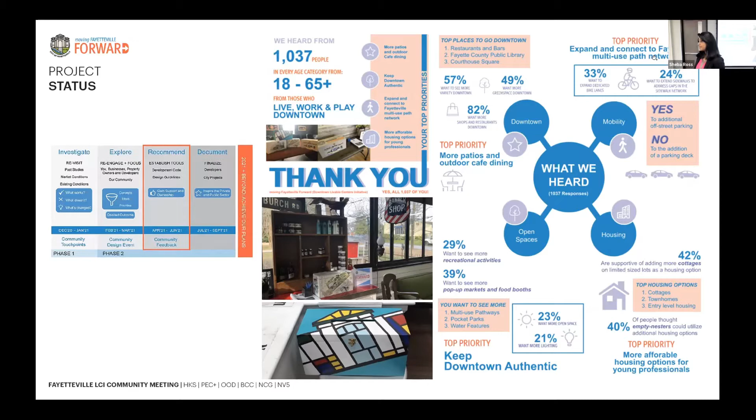We are not here to raze anything and bring in the new. We are here to enhance the best of what you already have.

I think one of the biggest outcomes of the community meeting is naming this project. If you remember, we asked you, and this particular name, Moving Fayetteville Forward, came to the top of the list. So we no longer go through the long name of Downtown Fayetteville Livable Centers Initiative. We call it Moving Fayetteville Forward. But as a team got together, we started thinking, what does it mean to move forward?

I think one idea that came to the surface is the fact that moving forward is not just in one direction. Like we can think about our opportunity here with downtown as a compass. And if you actually literally take the fact that a compass has north, south, east, and west, and connect it with the idea of what the Livable Centers Initiative really needs, we feel that your compass, Moving Fayetteville Forward, can be set with this idea of nature.

You have abundant nature here. You have representation from the Southern Conservation Trust. And you have creeks. You have access to large, beautiful open spaces. So we wanted to commit to preserve nature.

We wanted to look at economy. So Brian, I hope you're happy with that, because that's a central pillar, right? It's really no use having a plan that doesn't have strong economic impact. So we want to commit to economy.

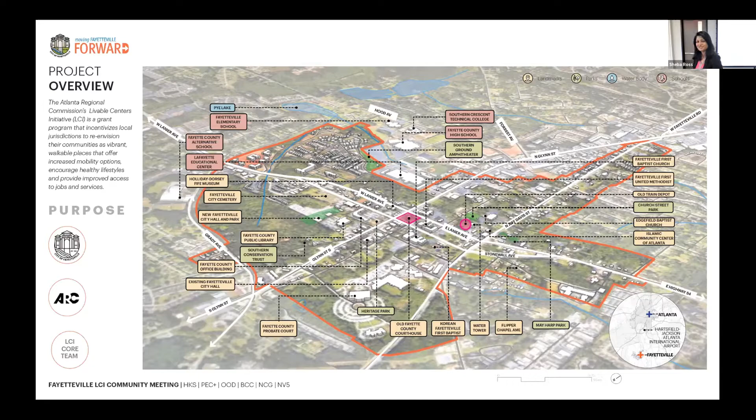Knowing that we want to set this up as a compass, I'd like for you to imagine this kind of character identity for your downtown. We talked about how you have about 900 acres, and we want to give it a sense of identity. So what we were looking at in terms of progress since the last time we spoke is what if we imagined the central downtown area as a core, and what happens in the north really as a gateway.

The reason we're thinking of this as a gateway is because we see this opportunity that's going to be happening in the North 85 corridor. We can see how, as people drive down from Atlanta, what's their first introduction to this beautiful Fayetteville downtown? What are you going to be doing in that North 85 area that could revitalize and become a portal to your downtown? So we were hoping we could characterize that area as the gateway.

And then you have the village. The village is really an offshoot of what is already happening with your planned unit development. You have the villages of Lafayette. You have a really well set planned community. And we would like to continue that character towards the west, towards the northwest of the core.

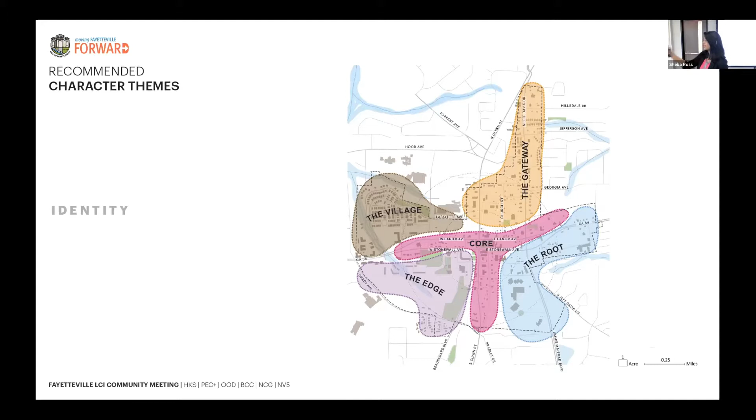So this characterization of a root plays really well with its counterpart, which is the idea of the edge. When you think of the edge, it is almost a play on the word leading edge - this notion that innovation could happen. You have a large parcel of land available there, right where you have offices, and everything happening with the Southern Conservation Trust kind of comes together to create a nexus. So we believe that creating it as an edge will give it that purpose for innovation and have a very interesting relationship with the root area.

So this is just thinking of it in terms of broad character themes.

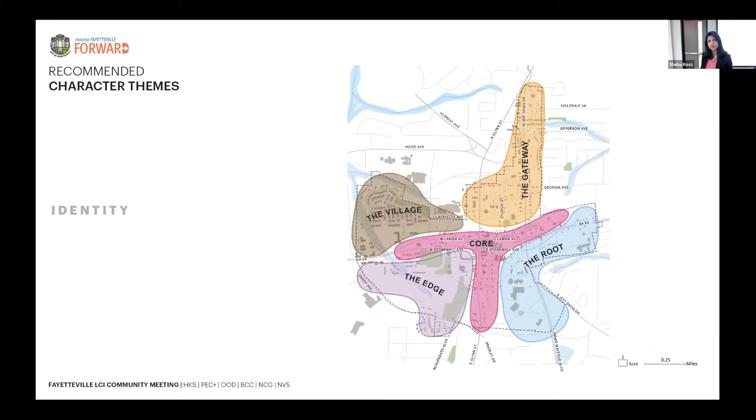Thanks, Sheba. My name is Russ Harrington, and I'm with the Landscape Architecture Division of PEC+, called the 360 Studio. We were looking at recommendations for parks and open space within the downtown study area of Fayetteville. We really based it on two things. One was community feedback from the previous meetings - what people wanted to see in their city, what activities people wanted to have that were accessible to them, and basically what people wanted. And then we also looked at available vacant spaces within the city, and that's where we based our recommendations for parks and open space.

The first one that really stands out is on the edge of Jeff Davis and Lanier and Stonewall. There's a conglomeration of vacant spaces right there on that edge that were identified as potential use for public space. There's a park close to where I live called the Abernathy Greenway, and I have some photographs of that park space that is very similar to this particular area.

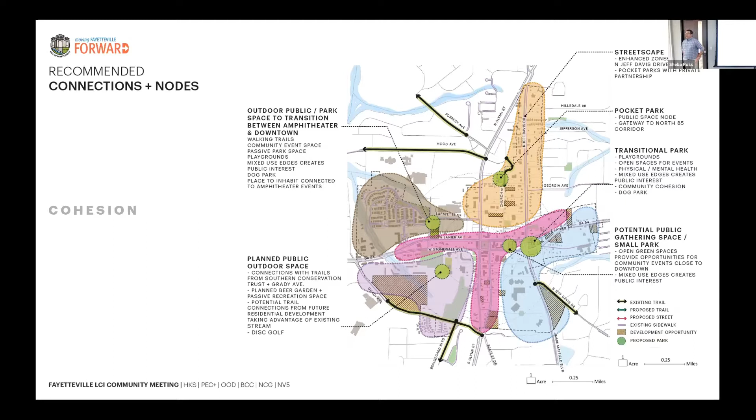Between Lanier and Stonewall, there's a vacant space that really serves as a great opportunity for public gathering spaces. There was a strong desire, one of the activities within the city that everybody liked to do—markets with tents, farmers markets, things like that—that were taking place on the road. I believe it was mentioned they were taking place on Lanier and some on Stonewall, but it'd be great if we had a place where that could take place all the time, somewhere that wouldn't impede traffic and could connect to the whole downtown activity we're talking about creating in this space. So that's the little smaller green bubble next to the one off Jeff Davis we were just mentioning.

The last one I'll talk about in greater detail—well, actually two more—is the area next to the amphitheater. There's a vacant space in this area that's not heavily wooded, but kind of nicely and openly wooded, which is a unique situation. It serves as a great opportunity for a transition between the activities going on at the amphitheater and the activity we're trying to implement in the downtown core area.

So it serves as a great transition space to get people safely from the downtown area to the amphitheater, and could possibly create some nice public space that does more than just add a transitional area between the amphitheater and downtown—perhaps a park, or a more open-area type of park, rather than the one I mentioned earlier, where you could have bigger lawns and things like that.

The last bubble in this southwest corner of the graphic is really just highlighting the public space already planned by the city, which is collaborating with the Southern Conservation Trust to create connecting trails off Grady Avenue and some of the newly acquired property by the Southern Conservation Trust. I highlighted that because it's a nice public space the city is actually pursuing at the moment, with the beer garden and some other things in that area.

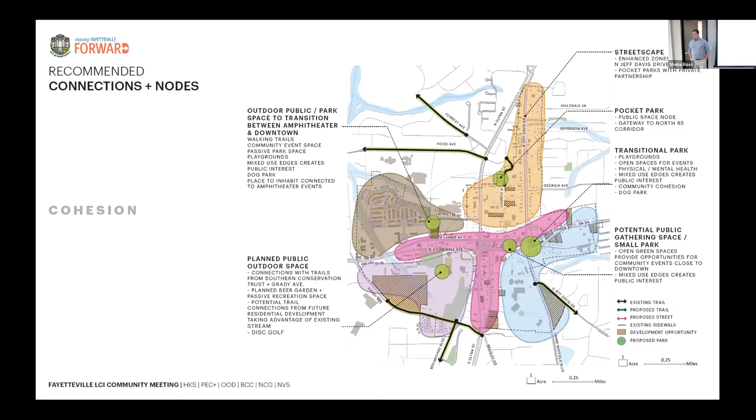So with that, I'll turn it over to Daryl, who can talk more about the transportation connections.

As we're looking at these parks as different nodes, the next question became: how do we link these parks so that they're meaningful and connect with the existing trails? That's really where we'd like to talk about the details of this.

Good afternoon or evening. My name is Daryl, I'm with NV5, and as Russ and Sheba have mentioned, I deal with transportation. I'm in our transportation and traffic group with NV5.

A large part of what we were thinking about on transportation with this project revolved around mobility, connectivity, and accessibility. One of the things we heard in our public meetings was that folks wanted to be able to move around Fayetteville a little bit easier, not necessarily by car, but by walking, biking, jogging, and not necessarily along streets with existing sidewalks.

But also to be able to do it along trails, and have bike lanes and that sort of thing. So one of the things we did through this is begin to look at where there were existing facilities, existing sidewalks, existing trails, roadways that had low traffic volumes, or at least enough room where you could do some things, and began to plan out spaces to build those trails.

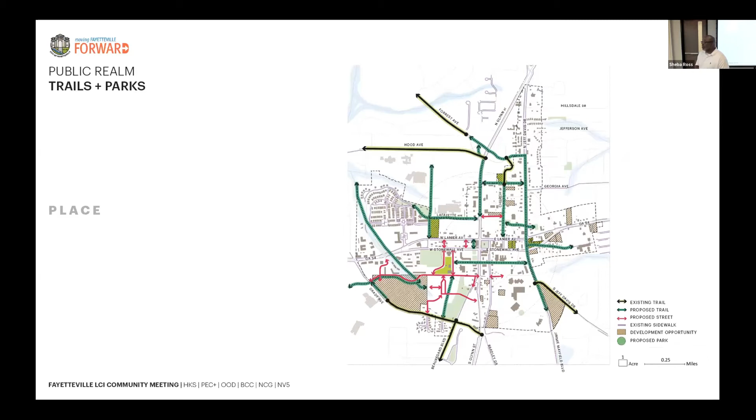One of the other things we wanted to do, and this goes to what Russ was saying, is that as we began looking at parks and open spaces, and places where people could gather, looking at communities, we wanted to try to connect those communities with those parks and open spaces, connect those communities with downtown businesses, connect those communities with the center of government, and all the activities we're looking at for downtown.

And again, we're not focusing on cars, we're focusing on people being able to come from the community, take a nice comforting walk, ride a bicycle, walk with the children, and be able to get to some of these places. And then even for the folks that are going to drive, some opportunities for them to come and park one time, and be able to get out and walk around through downtown.

So one of those opportunities is what we're calling the Alleyway Project. It is the area between - help me out with my streets here - Stonewall and Lafayette, where the Lanier... I'm sorry, Lanier and Lafayette.

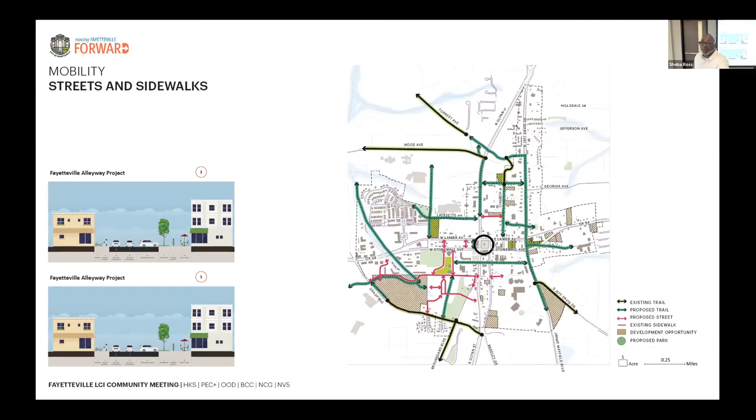Some of the other things we looked at were how streets like Lafayette could function - the idea that there are bicycle facilities within the Lafayette community, and then some on-street bicycle facilities on the main street, 54.

One piece of feedback we got was a desire to have more on-street bicycle facilities. The first thing we think of is making sure the street is usable for everybody, but also making sure cyclists are safe, that we're not putting them in a situation where there would be some sort of conflict with vehicles. So the concept we came up with here is something called a sharrow, or shared bicycle lane.

That ability to be able to have a lower speed street and also have the markings out that would allow cyclists to be able to use it. So it tells the driver this street is also to be used by cyclists, but it also gives the cyclists a space to be able to use the street.

We looked at that not only for Lafayette Street, but we looked at the ability to do that on Church Street and be able to connect the communities over on Church Street.

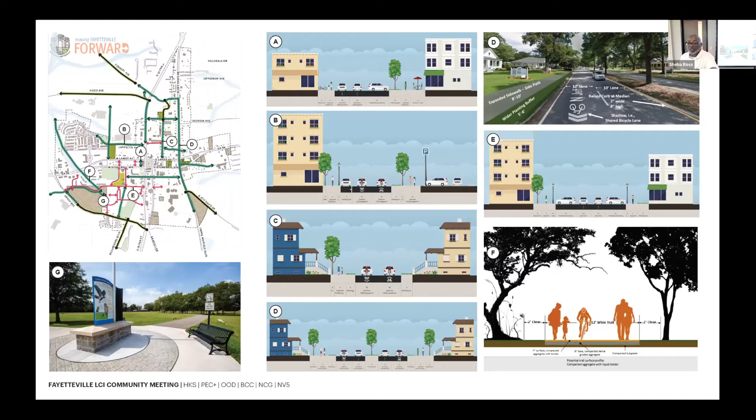Thank you. My name is Neil Desai with NV5. I'm a city planner, and one of my main roles in this project is to examine the existing zoning code.

And propose a new way of zoning in the city that's really going to bring together all of these thoughts and values that we've come across in the comprehensive plan and through the public engagement that we've already done for this meeting.

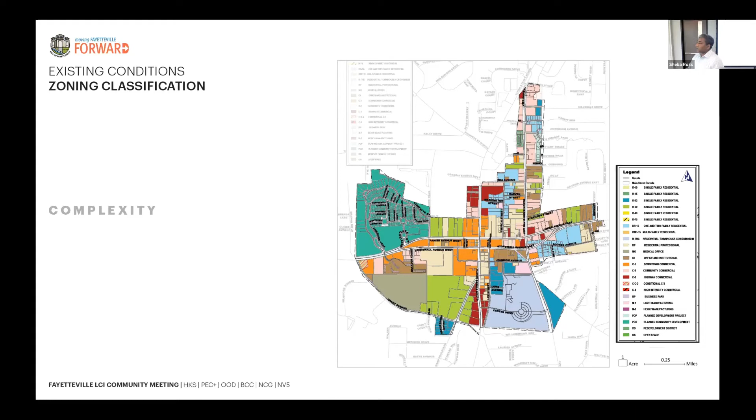And this is kind of the final layer. We've been looking methodically at general theme areas, which is what Sheba presented. We're looking at landscape areas and transportation, and now what are the rules going to be for the future? This map here, and we have a board in the back which we can all look at in more detail.

Where there's another area that's more commercial industrial. So you can start to see how these areas make sense in terms of what's already on the ground, the types of architecture and the types of buildings that are there.

So this isn't the zoning map, but it's starting to look at how we're going to start, what are the envelopes in which we're going to be looking at zoning. We want to respect the fact that downtown is one place, but it's consisted of different feelings around different areas. The traditional downtown core across from the courthouse has those small Main Street buildings.

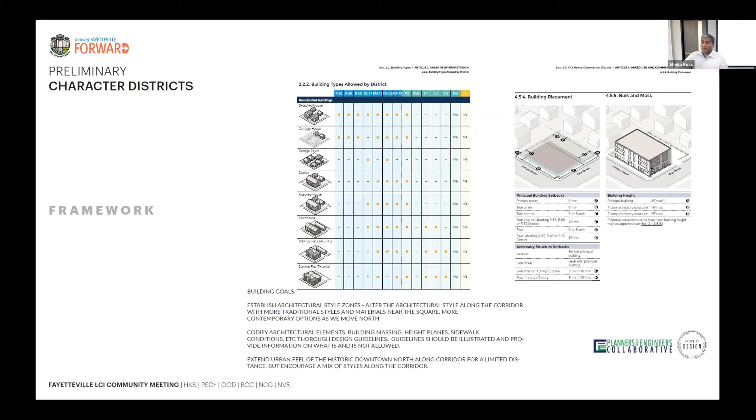I want to say that there are certain parts of the city where the zoning may not change at all. For example, the villages area is already fully built out, but we certainly want to include it as part of our analysis of the character. So this doesn't necessarily mean the zoning is going to change everywhere, but we're going to look through these character districts to see whether there should be changes, and what the nature of those changes should be based on the goals of preserving and enhancing, and wanting to evolve it into the future. This is the groundwork for the next steps of thinking about what regulations are going to be put forth to implement the vision.

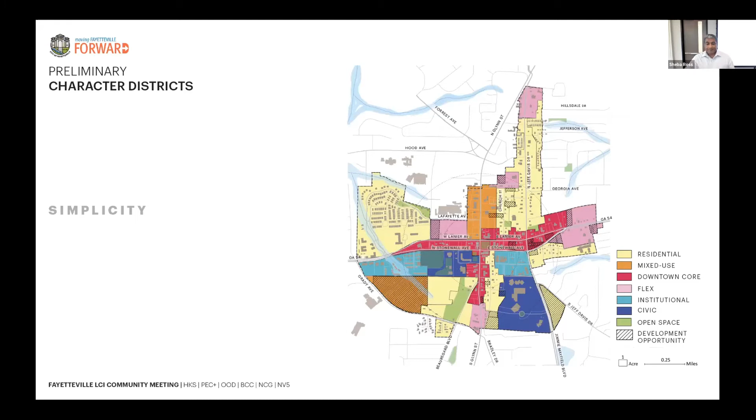Thank you. You can leave it at that.

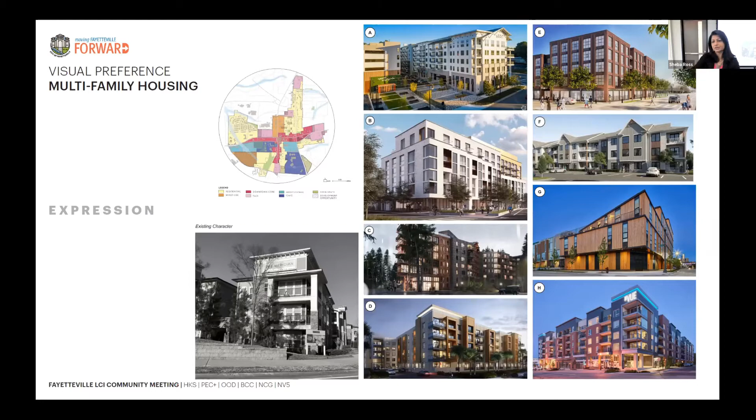This is the point in our meeting where we actually get to engage and hear back from each of you in different stations. We're going to do it in hybrid fashion, in person here and in our Zoom rooms. In the Zoom room you'll be broken out into 3 breakout rooms, with a facilitator showing you these different images as you're seeing here. We've printed and mounted these boards, and you're going to look through the different visuals.

Basically, we're going to run a visual preference survey. You'll use red dots to tell us images that don't jive with your vision for downtown Fayetteville, and green dots to let us know these are the spaces and kinds of buildings you want to see in your downtown. For those in the Zoom room, you'll let your facilitator know, and we'll do a thumbs up, thumbs down exercise.

This is for us to give us cues as we build these guidelines. We want to ensure that the guidelines we offer, as we connect them with the code, come from your preferences, from the community's preferences. We've already heard a lot of ideas through the survey, but this is our touch point to actually get closer to creating guidelines.

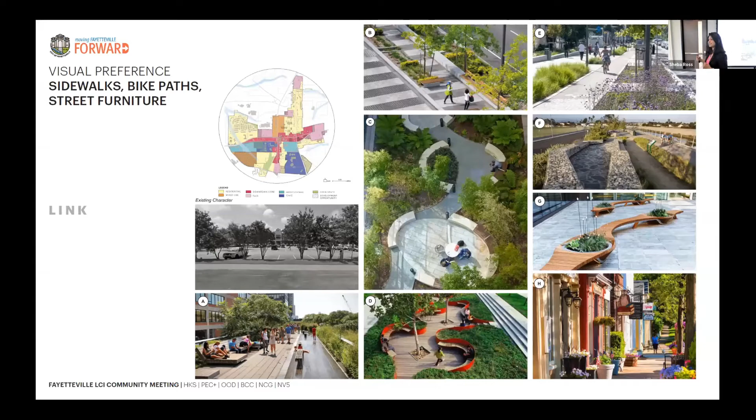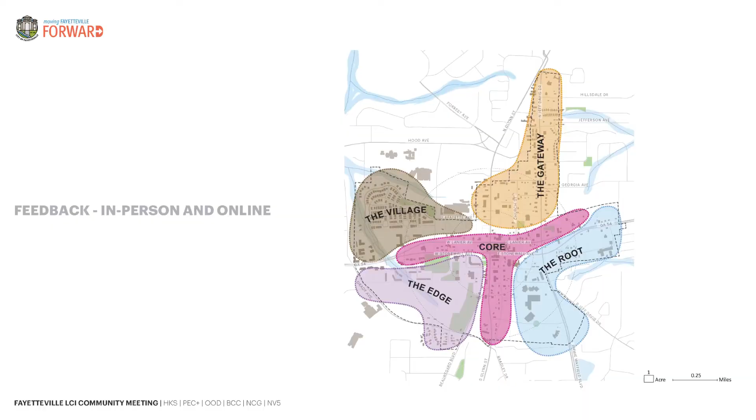So a short discussion on the maps, but there were a couple of questions related to specifics and details within here. One question, Sheba, was whether these images are going to be available in the future to share with the participants today, and I didn't know the answer to that.

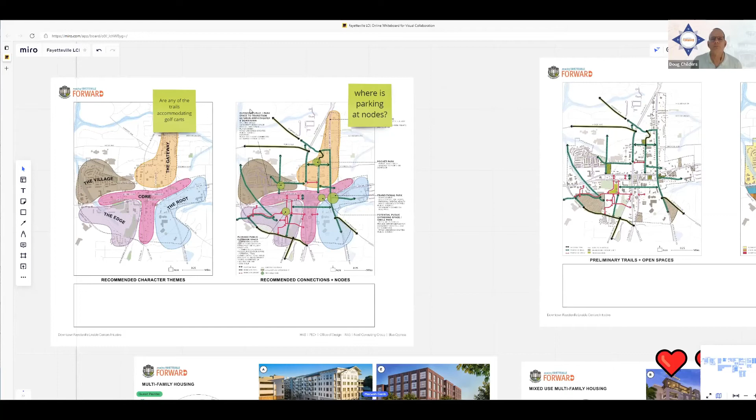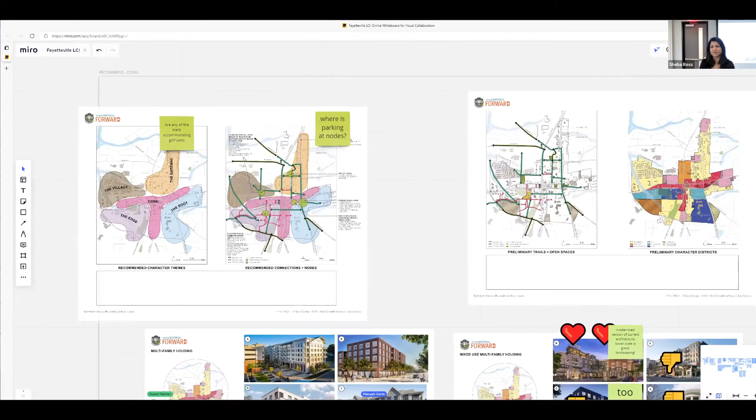Yeah, I can address that immediately. We'll be publishing our final plan sometime in August. Like I mentioned, these drawings came straight from our drawing board. Nothing is final, we have to incorporate your feedback. The recording of this meeting will be available online, which shows all the images too, but just remember that nothing is final.

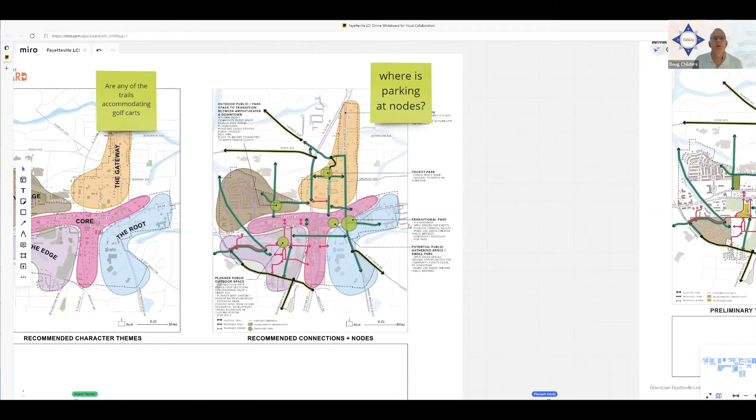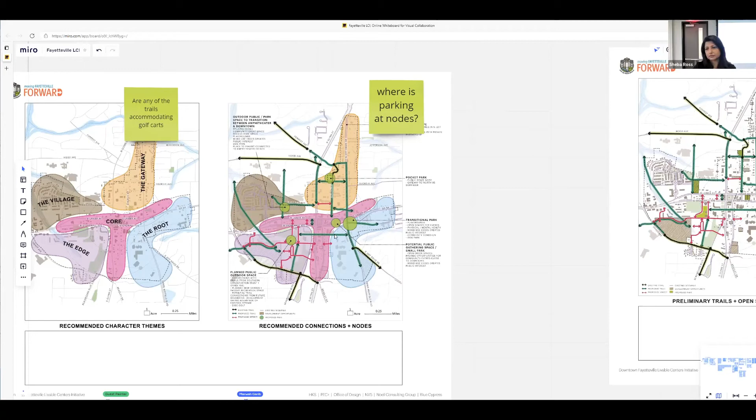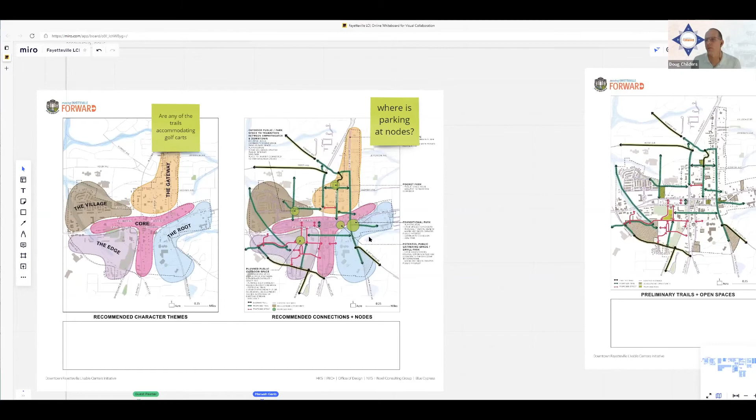There was interest in the text on here, and some people were having a hard time seeing the details, the recommendations within the parks plan. Another issue was parking—how are we going to handle parking at the new nodes we're proposing? I think the answer I gave is that it'll get studied in detail when those parks get developed and funded, and every one of them will have a different answer. So it's a really good question to keep in mind, parking in general.

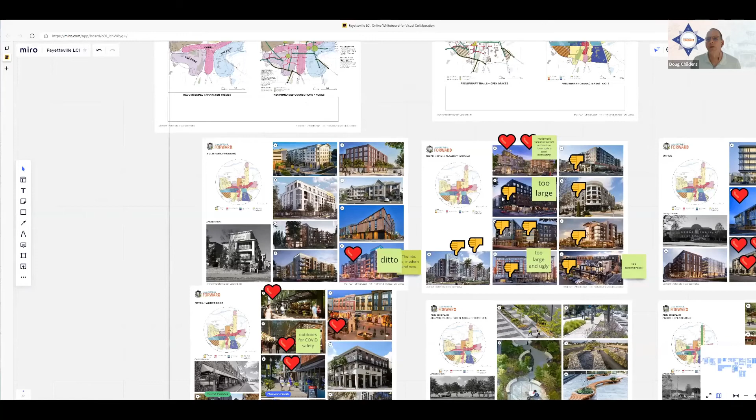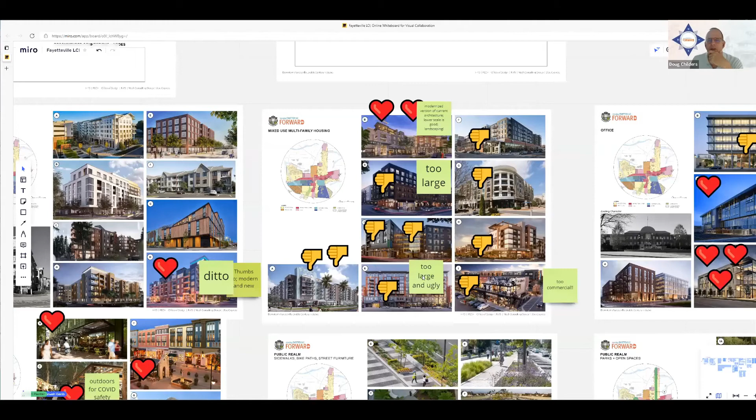We had a very opinionated discussion. Multifamily didn't get people too excited, but we got pretty interested in the mixed use discussion. I see so much thumbs down—I couldn't find my thumbs up, so I had to use hearts, and it got deleted. So heart, you get the idea, right? But yeah, there was a lot of thumbs down. A lot of these images felt too modern and too large in general.

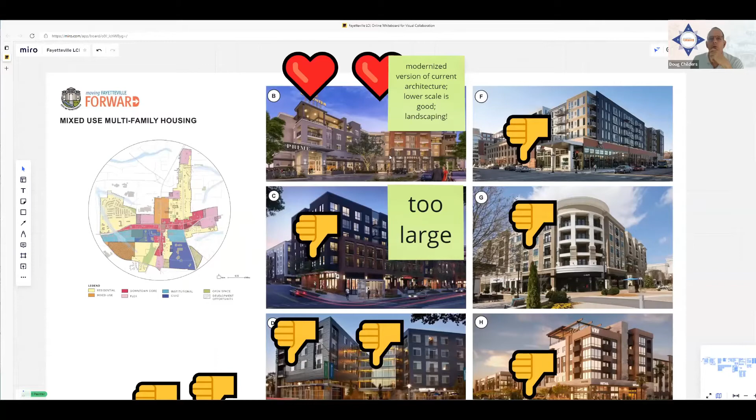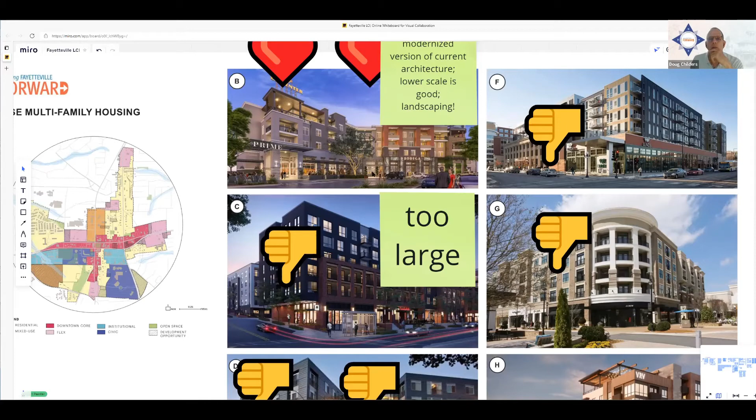I think the real attraction was to this medium scale, somewhat transitional architecture with the mixed use components at the bottom. I think this was appealing to everybody on the call, and pretty much everybody said no to everything else. So it's a clear choice on that one.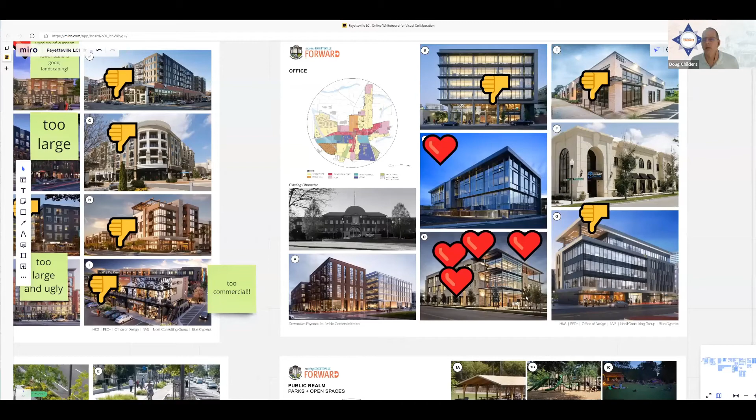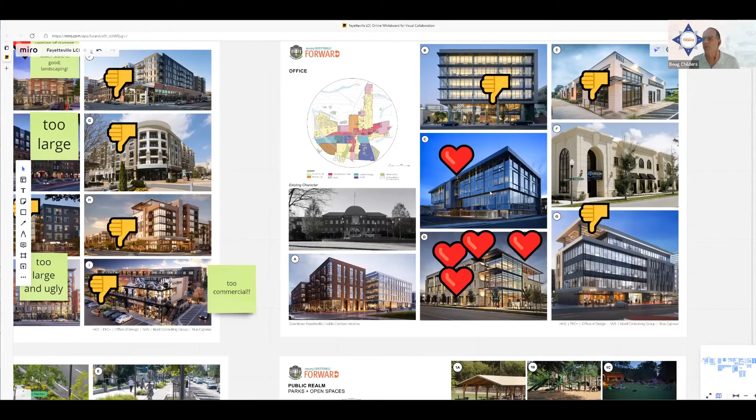Interestingly, this group had a different take on some of the office proposals. They really liked image D, partly I think for the scale, but also this ultra modern building. So I think there's a lot of interest in keeping the right scale and the right size of buildings and architecture in Fayetteville. That's kind of my takeaway from those discussions.

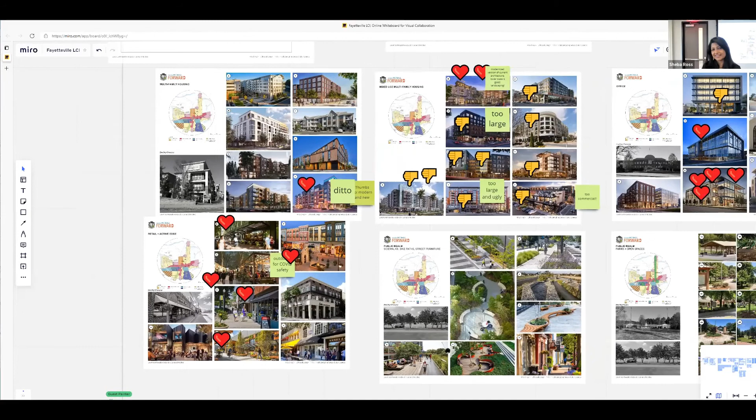I keep thinking I should always say don't shoot the facilitator. I always forget that, but still want to keep our time. So actually, maybe this is a good time—Russ, if you don't mind giving us a summary of what you heard. If you don't mind coming right here, because I think the acoustics are not evenly distributed.

Should we bring the board? You're welcome—do you need help taking the boards?